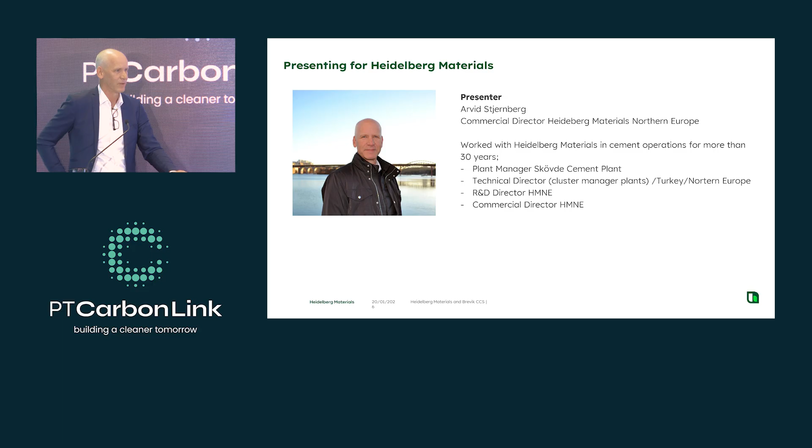And especially when I was the cluster manager, I was responsible for the cement plants. We had 6 plants at that time in Northern Europe. And that was the time when we took the decision to move with the Brevik project and all the technical things. During that time, I was responsible for the plant.

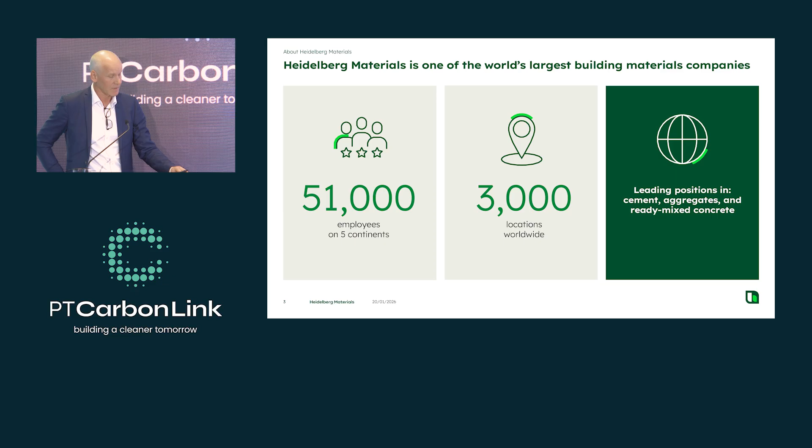Heidelberg Materials, for those of you who don't know us, we are a very huge company within building materials. More than 50,000 people employed over the world. We are in 3,000 locations worldwide. We are both in cement, aggregates, ready-mix, also actually some precast, it's not mentioned here. We have around 100 cement plants in the world. I heard this figure before, coming to the targets.

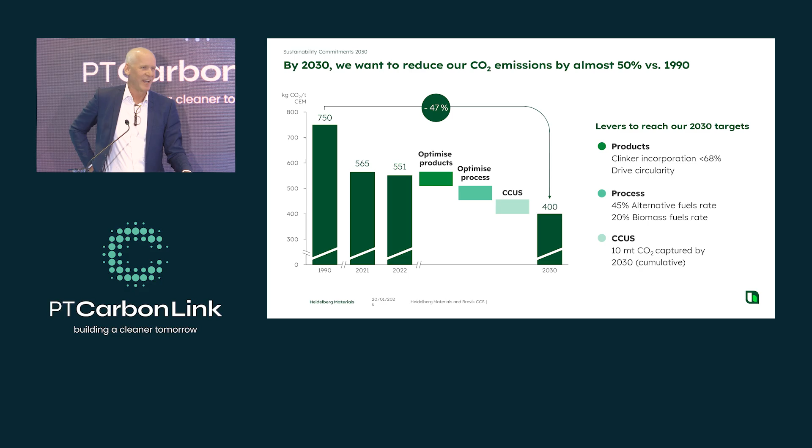Heidelberg Materials, I'm very glad to say, because in these times when things are moving in terms of environmental ambitions in the world, Heidelberg is still very ambitious and just launched the 2030 ambitions. Taking then, especially if we look at cement, they have the ambition to take the cement emissions per ton, which was mentioned before - we were at 750 kilos per ton in 1990, and the ambition is to take it to 400 kilos per ton by 2030 already. So that's only 4 years away. It's not so long to go.

We have already taken some steps, of course. We were at 2022, the latest updated figure I have on this slide, I'm sorry for that. We are at 551, and the levers are, of course, to work with the product, to use as little clinker as possible, to work with the process, to push alternative fuels. But the last step, also mentioned before, is of course to implement CCS or CCU. It's important to say that even with the implementation of CCS and CCU, the ambition to still optimize the product and push for the fuels will not disappear.

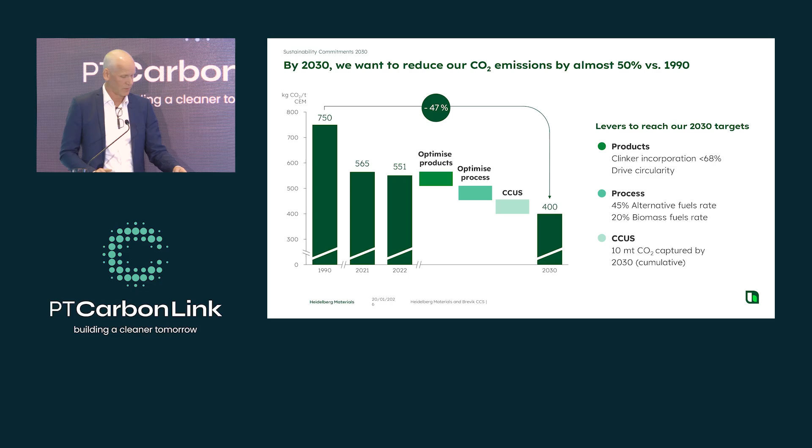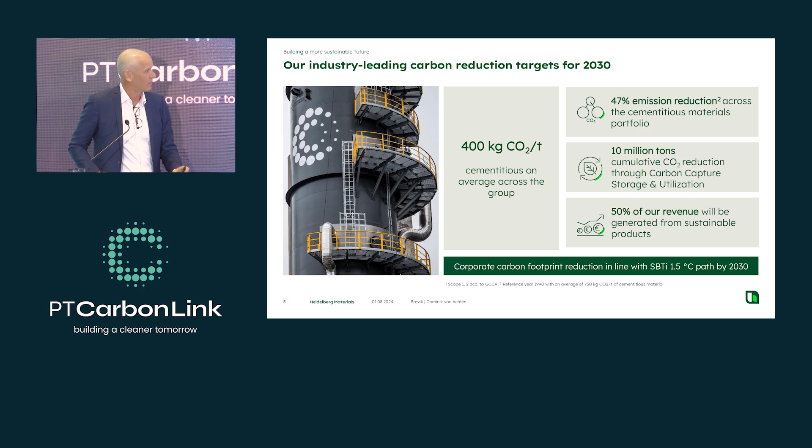In many parts of the world, these are the most simple and cost-economical steps to take. But in order to get all the way down to zero eventually, CCS has to be implemented, as was also explained before. The target for CCS is to collect somewhere around 10 million tons by 2030. So time is running. Again, if we focus on cement, there's 400 kilos CO2 per ton worldwide in all our plants, which means that in some parts of the world we have to go much lower than that. The 10 million tons is the cumulative CO2 we want to catch, and this will mean that we follow the carbon footprint reduction in line with the overall target of the 1.5 degree target.

To do this on the CCS, I think Heidelberg is pushing this very, very hard. We have 2 projects right now - I will present the Brevik project more in detail. We have 2 projects up and running: Brevik with 400,000 tons CO2 per year, and a smaller one in Lengfurt, Germany, of 70,000 tons.

Then we have taken a final investment decision just this last year to go with the investment in Padeswood, where we aim to collect 800,000 tons, twice the size of Brevik. And the next in line, very close to final investment decision, is the larger plant in Edmonton, going up in size to 1.1 million tons. The catching, I will come back to that.

But then we have several projects in the development phase. Some of them are quite far ahead, like the one I have to push all the time - you know, I'm from Sweden, so Slite, and that will be the biggest one, 1.8 million tons. And you have several other projects as well.

The reason why they are not moving to final investment is very often from a financing point of view—you have to come to an agreement with the government and also with the EU, if we are located there, to find the right investment scheme to make these projects move forward.

We have some pilots running with different types of technologies. We have Leilac 2, probably some of you have heard of it—it's a separate calcining project we've been running for quite some time. We've also made two quite big projects on oxyfuel, both the calciner part and the full line, which we do in Mergelstetten in Germany. But this is more on the development stage. From a technology point of view, things are moving, but most of these projects are so far based on amine technology, which is the one I think is ready for deployment on a large scale right now.

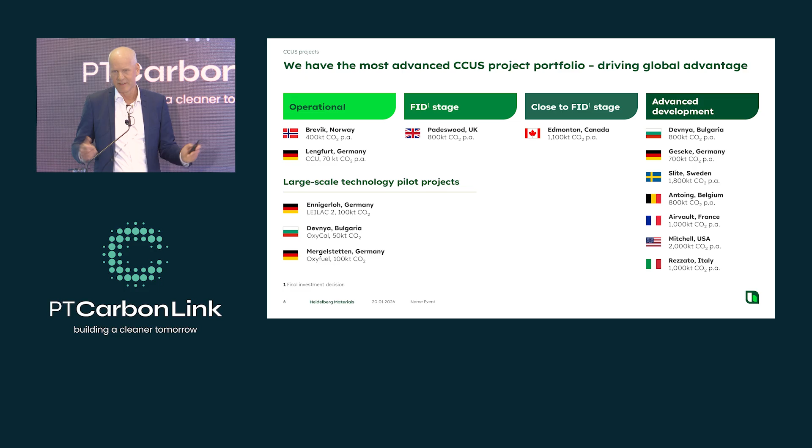It was mentioned, this Longship project. This was a Norwegian state project, and I think it goes very well in line with what you were presenting with the Carbon Link project—this was a project launched by the state to take a full look at the value chain of CO2, all the way from the emitters, that's us, to storage and transport.

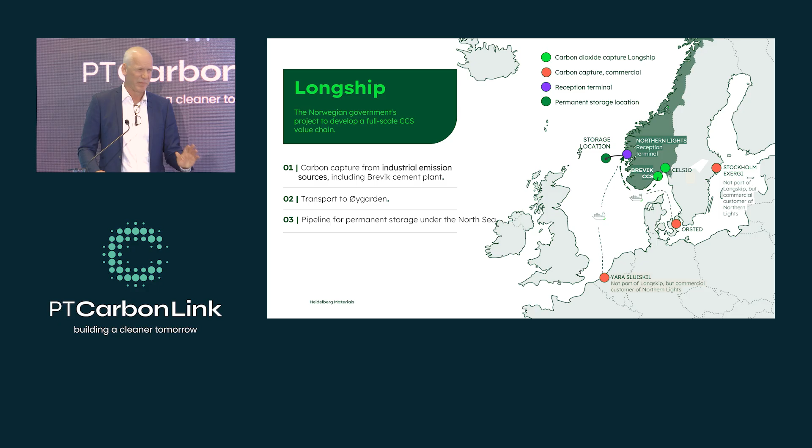Initially in the project there was the storage part, handled mainly by the oil side. Equinor, a big Norwegian oil company, came in and they formed this Northern Lights concept, and they are responsible for the storage and transport of the CO2. Then we have two emitters in the project: Heidelberg Materials with our plant in Brevik, and Celsio, which is a power-to-waste-to-power plant.

in Oslo. They were there in the project initially, but halfway through the project they fell out because they couldn't get the financing. But now they are actually back in again, so they will be up and running in a year or two. We are already up and running—I will show you that.

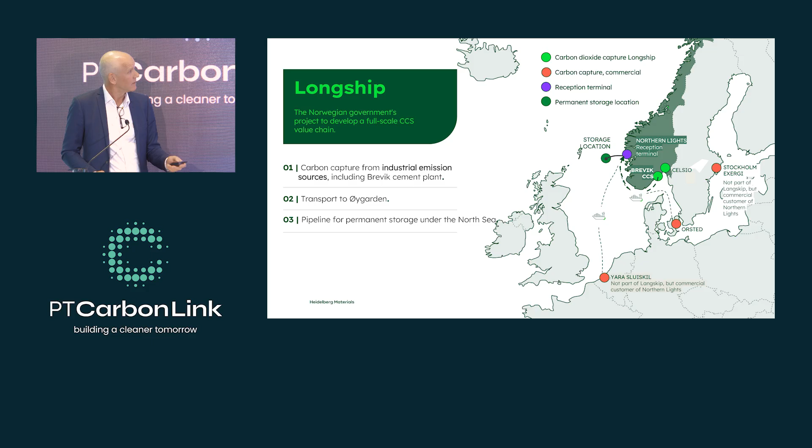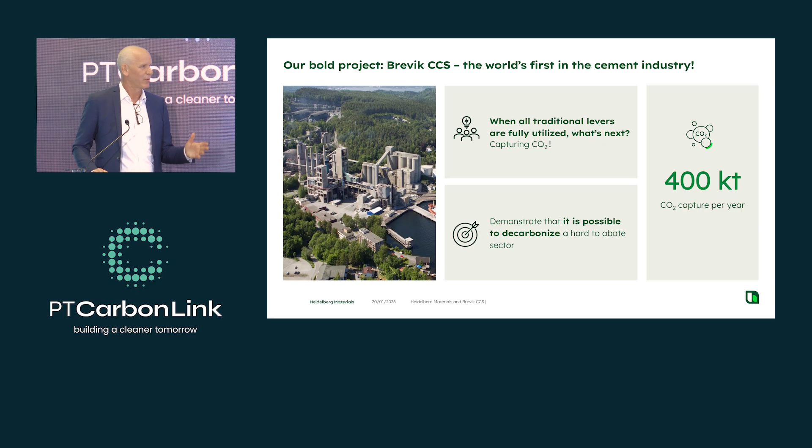I will focus on the Brevik project just to show you how a project at an emitter side can look. This was the first one in the world. We have always called it a pilot, even though it's 400,000 tons per year—still, it is actually a pilot because it's the first one up and running.

The target for this plant is to capture 400,000 tons, which is 50% of what we emit in the plant. The plant emits around 800,000 tons per year, but we chose 400,000 for two reasons. One is that it's a pilot, the first one, so we wanted to restrict the risk a little bit, even though it's already a huge risk to build this size.

The other reason is that this amine process we built needs a lot of energy. The internal energy available in a cement plant, in terms of waste heat and so on—other plants normally use it for electricity, drying, and so on—is more or less enough to also power the capture of CO2. If you want to go above that number, you have to add a lot of extra energy, normally in terms of electricity, and these are huge amounts of electricity, both costly and sometimes not available. So it was a very good level to start at, I would say.

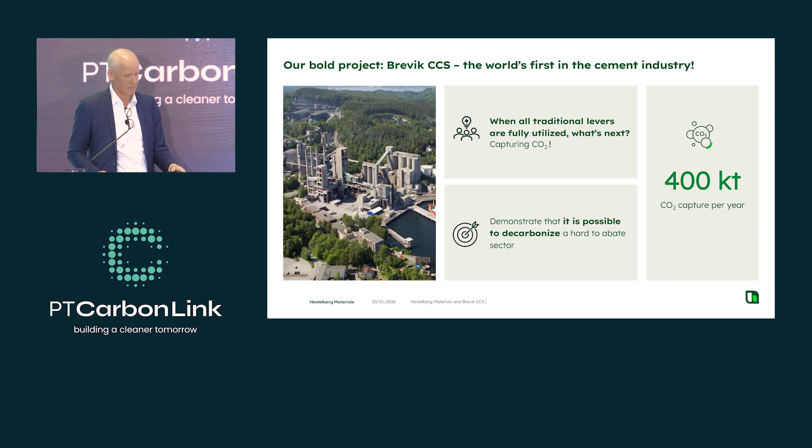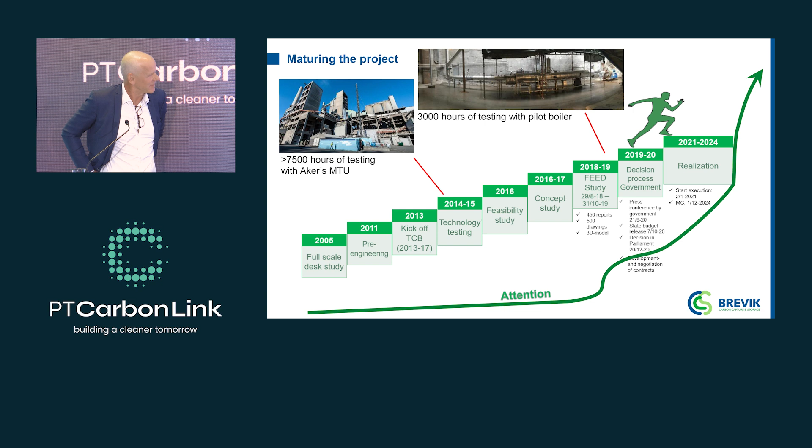I had a discussion on what to present, and one message I should get through is that it takes time to get these projects materialized. We've actually used this from the very beginning of the project, adding each block as we went through. I asked the project manager at what point we should change the guy running up these blocks to be a little older and slower, because it felt like it was taking a very long time. But we've kept him as a very athletic young man running up these stairs.

Anyway, we started in 2005 with what we call a full desk study. We got some funding from ECRA at that time and made a study on where the industry stood in terms of available technologies and how a project like this could look. We used that study to start the pre-engineering, which eventually led to a big seminar in Oslo around 2013, where we formed what we call the Technical Center Brevik. We went together with us, Yara, and some other industries to look at 4 different types of technologies and make a much deeper study into which of these technologies are ready to be implemented.

So in that study we were running, the main one started a test unit for carbon capture. We ran it for 7,500 hours together with Aker, who later became the supplier of the system to the plant. After this test, we started to see that the amine was the one that was ready. We also tested membrane and calcium looping at a very small scale, but at that time, the amine was the one that was ready. That's also difficult in these types of projects when you have 5 to 10 years of implementation.

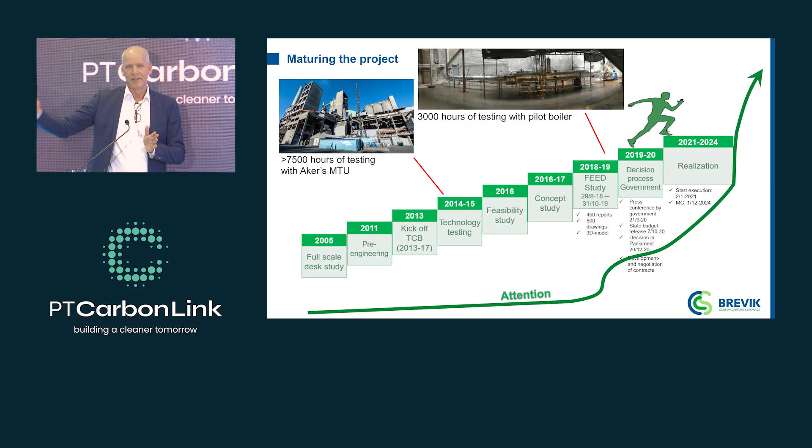Technology is moving very quickly, and how can you be sure you're actually investing in the right technology? It's like when you buy a TV in an electronic store - when you move out, you know there's a new TV, half the price, double the features. But it's not moving that fast here. Even though there is a lot of development ongoing, we still see that the amine we now have is very, very efficient, and definitely a technology we would still go for if we were to choose today.

So we went through these steps, the concept study, and then in 2018-19 it started to move. We launched the FEED study, made a huge number of reports, and finally had a decision by the government to move forward with this Longship project, in September 2020.

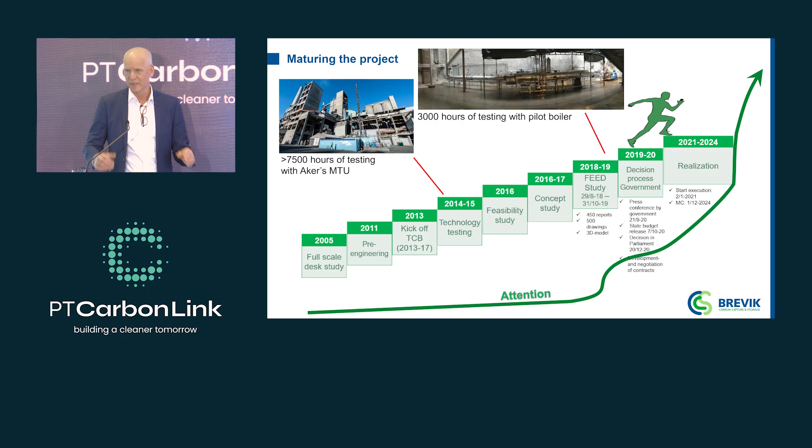It was good timing to get the decision, but the timing was maybe not perfect, because in 2020 we had COVID running, so not perfect to start the project with a huge number of people coming onto the site - very difficult to move forward. And the second setback was when the project was up and running a year later - the terrible situation in Ukraine affected us a lot as well, because supply of steel for these types of projects is largely coming from Ukraine, and electricity components and so on were definitely hurt by that.

So the project was suffering a little bit from that, but anyway, we pushed through. Then in 2024 we had mechanical completion, and during last year we could finally start the project.

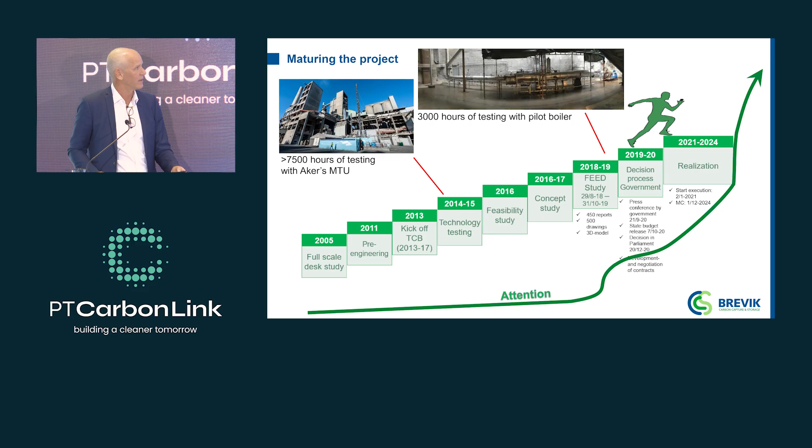All along this line, the interest in the project has been huge. We have had many visitors - I think many of you have been there, visited both the plant and also the Northern Lights facilities in Øygarden.

And then we have had, of course, the authorities and government. They are definitely crucial in this project. First of all, they funded to a very large extent all the things we have done - the studies, the FEED studies and so on, they funded up to 90%, which is extremely high. And when we come to the technical project, they have funded at the level of 75%, which is of course also very good for a project like this.

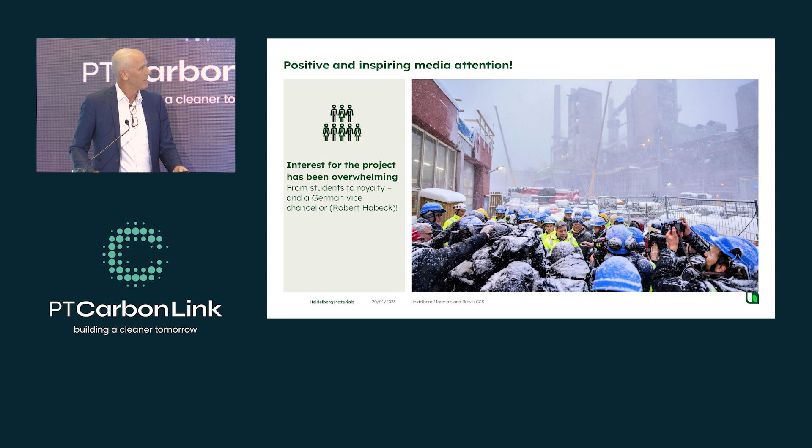Okay, the plant - it's located in the southeast of Norway. It's very cramped into the mountains, not much surface area. And for those of you who have seen a cement plant before, you might wonder where the quarry is. The main quarry here is actually under the plant - it's in a mine, which is extremely rare. This plant has a mine that goes all the way out under the fjord.

Okay, some short facts on the project. It's of course a huge project - we have 1.4 million hours of working time. There's a picture with some of the construction people at the site at one point near the final end of the project. You have 18,000 meters of piping and so on, 2,500 valves.

It's really not a cement plant for us. I've been on the mechanical side in cement for 30 years - this is more oil and gas, and for us it's very new. That's also something to think about when you start to construct this - the cement guys and girls are not completely ready in terms of what kind of standards and so on are needed. So this is something to think about.

Very good record when it comes to health and safety - we're very happy for that. No major injuries, and only 4 LTIs over the complete project, which I think is a huge achievement.

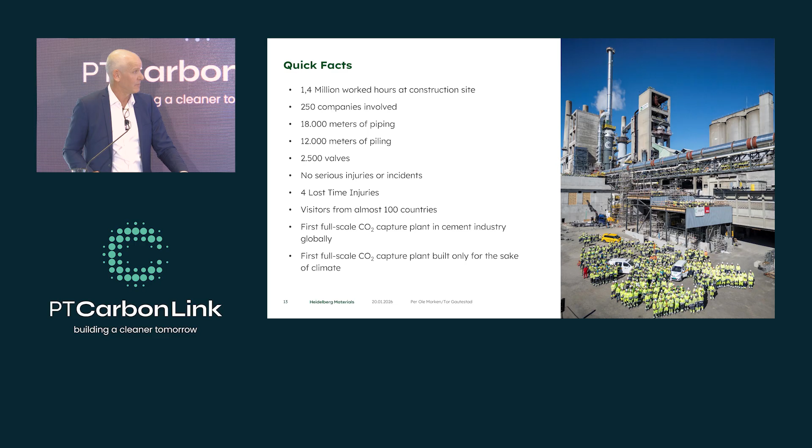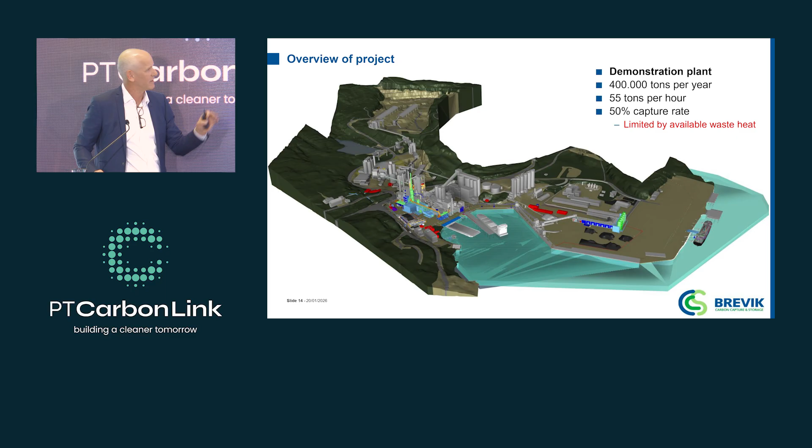And again, the first full-scale plant up and running now, so we are happy for that. This is another view of the plant, just to show you what type of achievement this is. You have the quarry, the rock coming up from the quarry to the storage, up on the shield, and then the cement plant going out. All the cement we produce goes out through ships, and now also the CO2 will take that road. Everything in color here is what needed to be added when we made the CCS.

If you just look at the CCS itself, it looks like this. I cannot go into the details because that would take too long, but for anyone who's interested, we are more than happy to share everything around this facility.

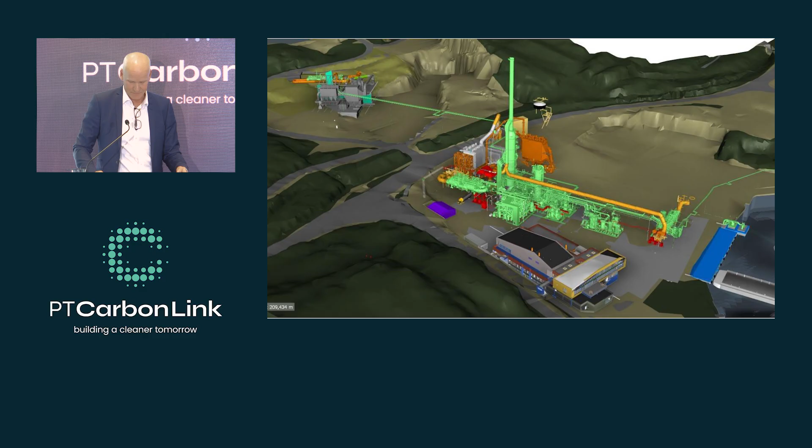Then the storage and transport is a big part of this. In our harbor, we have a storage facility that can take 4 days of production only, and then we have to have a ship waiting at the harbor. So basically, 1 or 2 times per week, we will have a ship leaving with CO2. It's very new for this. In the past, we just delivered cement, now we deliver cement and CO2. Almost 50% of the volume is now CO2, so it's a huge volume added to the total volume we transport out of the harbor. It's something to think about.

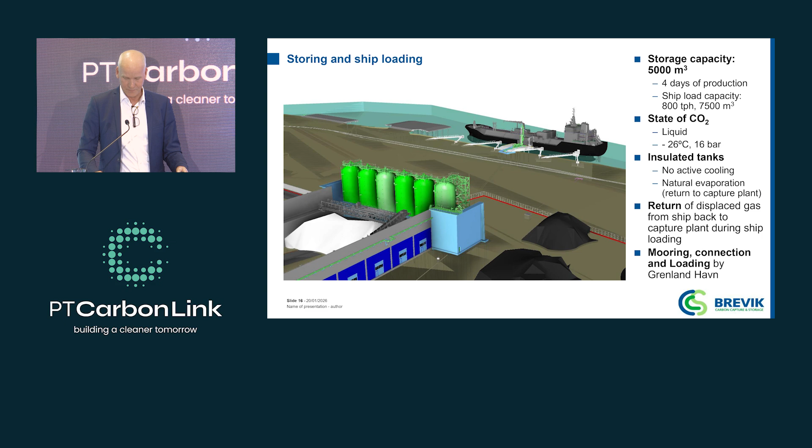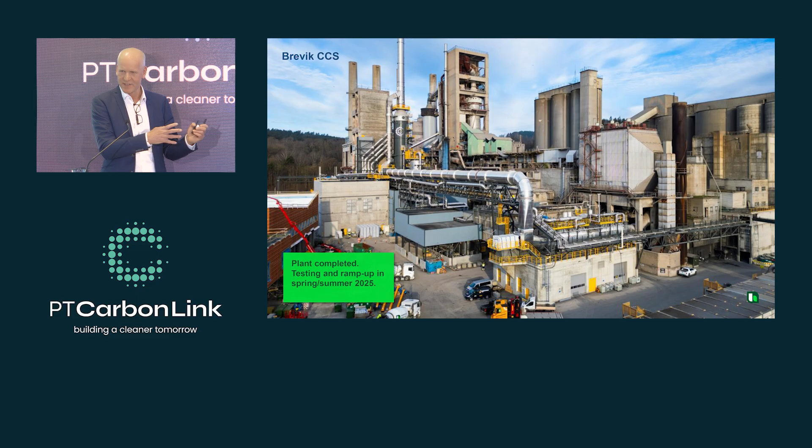Some pictures from the plant when it's ready with the new stack and the whole system. Most of that is waste heat recovery to drive the amine process, which is at the heart, where you actually capture the CO2 at one temperature and it releases at another, and you do that in a cycle, and you need a lot of heat to drive that. So we have a lot of waste heat exchangers, compressors, fans and valves.

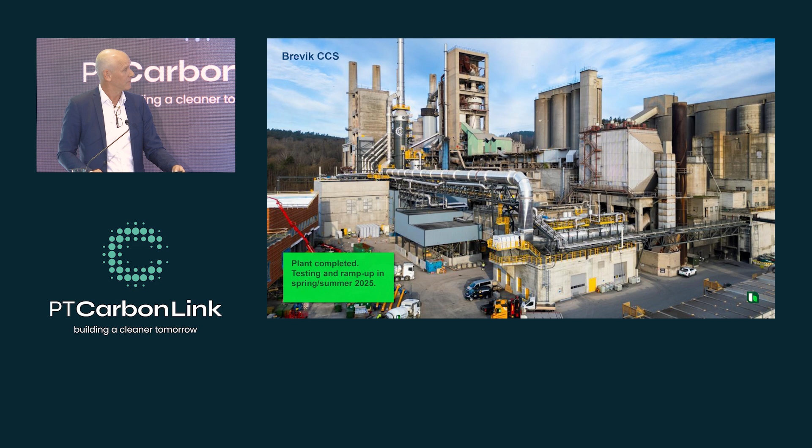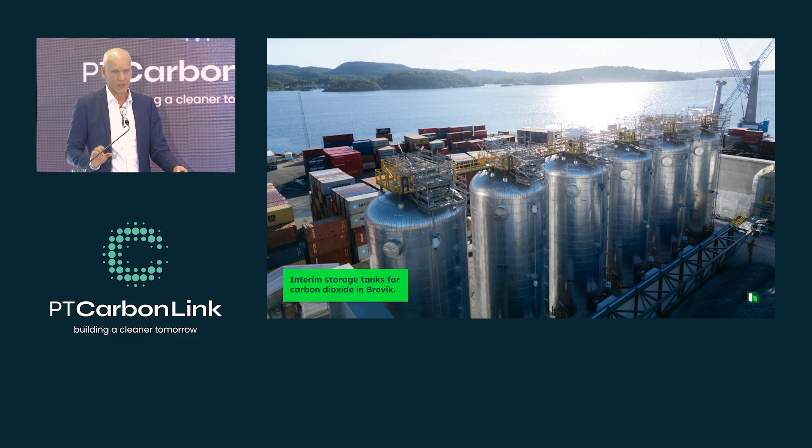And here again, the storage tanks in Brevik in real life. This is actually an animation—it doesn't work in the PDF format I sent you, so I think we will skip it, but you will get an idea of how it works basically.

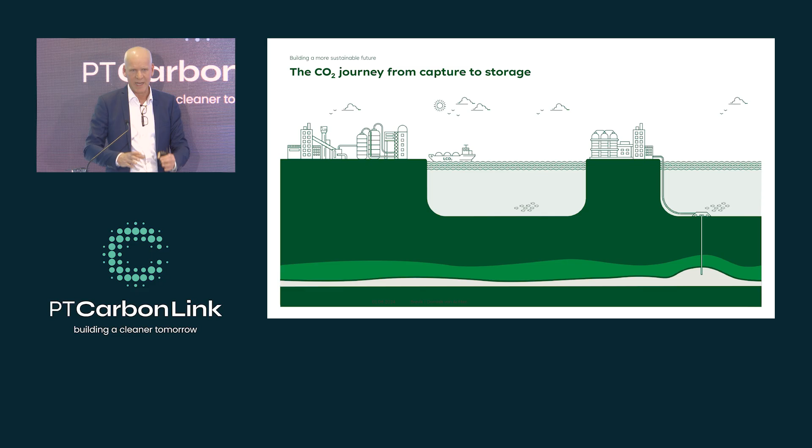We have the capture, then we load all the CO2 on the ship. We take it to a Northern Lights facility, a bit higher up in Norway on the coast, where we offload the ship. They treat the CO2 again, bring it up to a higher pressure, and then from that facility they pump it through a pipeline down into the seabed, 2.6 kilometers below sea level, so very deep. They can then connect others—we are the first ones. The system is now up and running. Now they are waiting for this waste plant in Oslo, and they are also negotiating with others. It's built in this way that they have now one hole. I saw that in your plan as well, that when that is full, or when the capacity is reached, since you only have a certain capacity for each hole, they can just add another one and another one, so they can go up in capacity in the years to come. This is the plant in Øygarden.

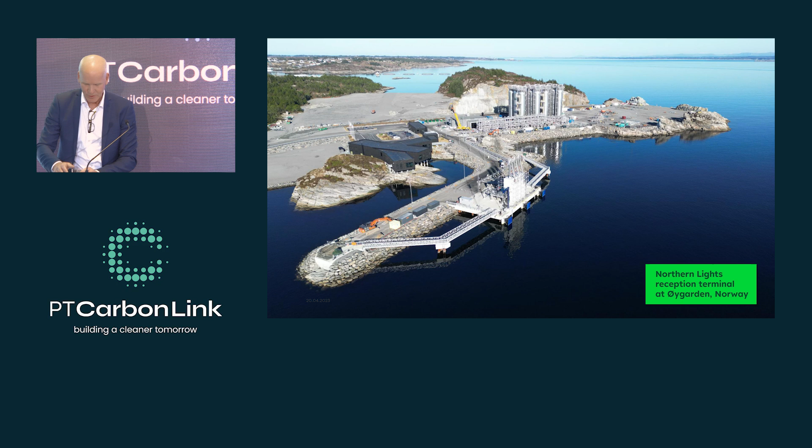All right, since I'm in commercial, I need to talk about the product. I have to take the opportunity to sell a little bit here. No, but I think it's very important, and I think this is also something that is interesting to understand—what will happen on the market when this product comes to the market.

And we take that from the carbon that we have. And then you have a product with 46 kilos per ton, so very, very close to zero. We are not allowed to say zero cement—it's very important from a legal standpoint. The lawyer said we cannot say that because it's not zero. So we have to say near zero. But it is as near zero as you can come.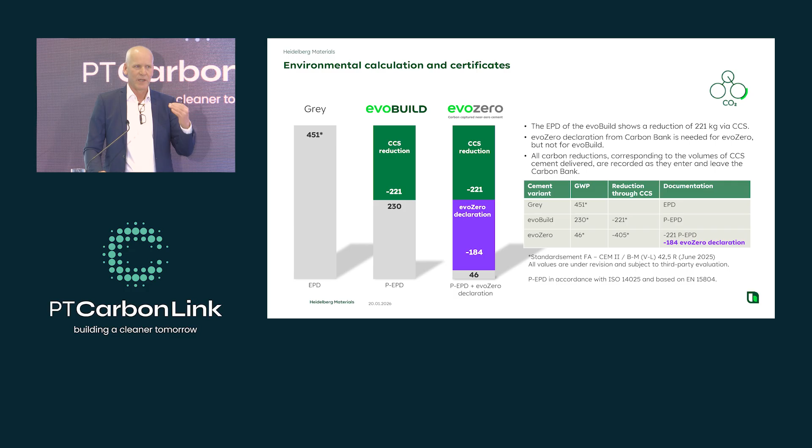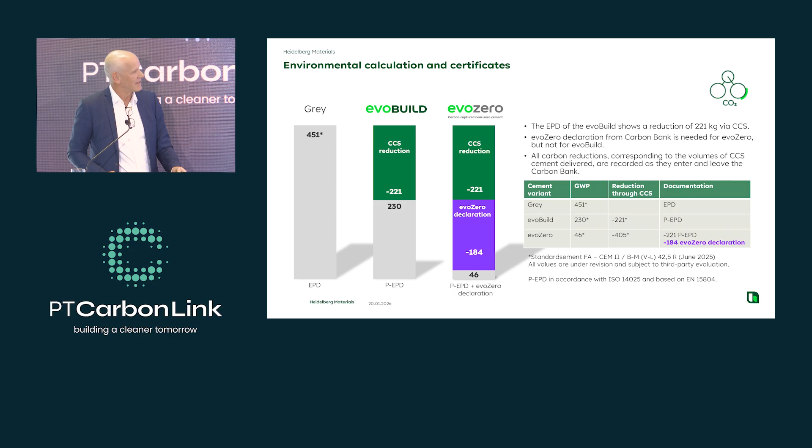And the reason we cannot take it to zero is because we are not allowed to reduce the CO2 from other activities besides our cement plant, like transport and these kind of things. We cannot just remove that by taking from what we have captured. It's a little bit technical, but these are the two products we are now offering the market.

And for you, this is also a big part that has been necessary to develop in order to create these products. That's something to think about when you construct a plant. If you have one plant with 100% CCS working and others not, what will you do with the market? If you have a customer very near that CCS plant who isn't interested in buying your CCS product, do you have to take it from another plant, or how do you do that?

So you don't. We are giving customers now the opportunity to buy still the old cement, we call it the gray cement, or they can buy the carbon reduced and halfway, or they can buy the whole way reduced, the evoZero. And this is the way we do it.

We take the cement out of the plant and the CO2 that goes to storage. We take certificates from that and put that in a carbon bank. So every time we have a ton going down into the sea, we get one ton into the carbon bank. And then we use that carbon bank whenever we sell a product where we want a reduced CO2 footprint—we take some of the CO2 from the carbon bank.

And that's a huge system. It's verified from a third party—it's DNV doing that for us. And it's also a pilot, I would say. It's new, but we are learning a lot, also to get the customers to agree to this and say that this is the right way to go.

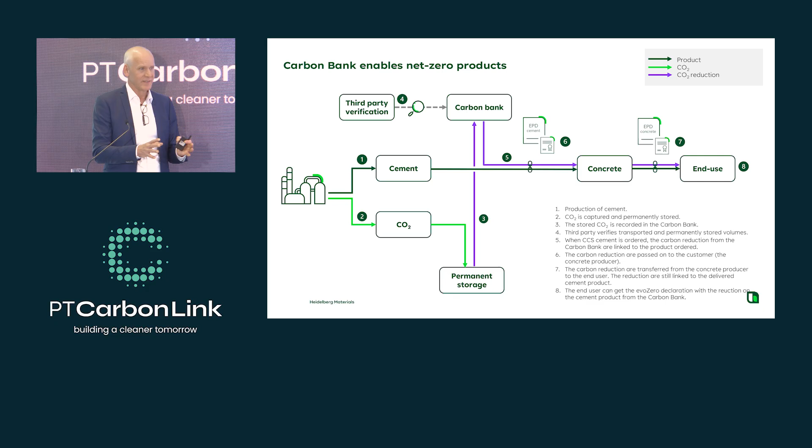It's also a discussion we have, because the word mass balancing is coming into play, and those kind of things. So it's steps to take. But from where we are now, with one CCS, to where we should be in 2045 when we have only CCS, we have to do these kind of things to make it work.

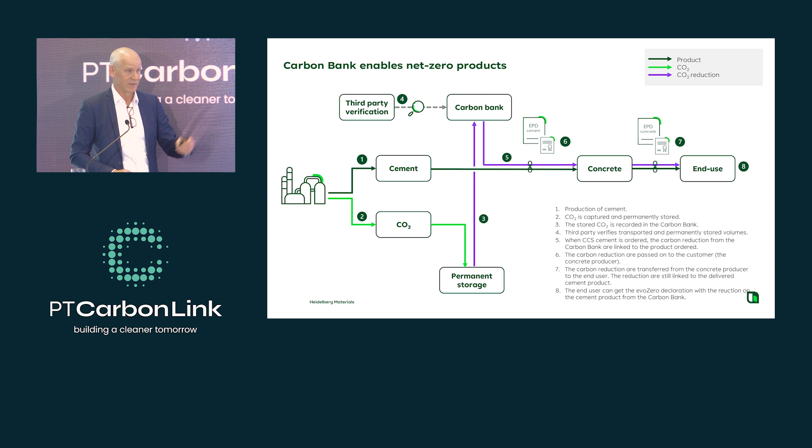And eventually, we will find a system where you sell all the cement near zero. I will show you this one as the last slide. What you actually can do with this product in construction is amazing, I would say.

It's a very, very effective tool to reduce your CO2 footprint overall, and you can do it on a massive scale all of a sudden. It's not like changing your vehicles to electric and taking away a few kilos—here we are talking about a percentage of what's actually emitted in a country. So it's a very, very strong tool.

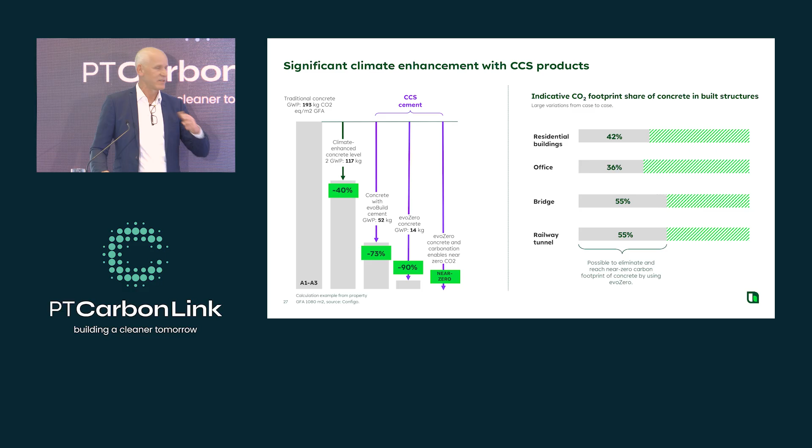Because if the customers don't buy the product, then it will be very difficult to build the systems and the plant eventually. And the opposite—if customers throw themselves at this, we're sold out, everyone wants it—you will build your next facility here very, very quickly, because there is money to be made.

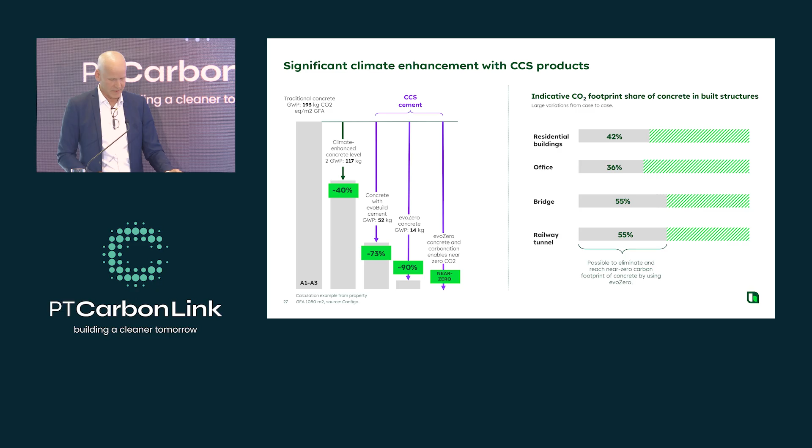Okay. So 20 years later, we are there. Hopefully you can do it much faster, I'm sure. Thank you.